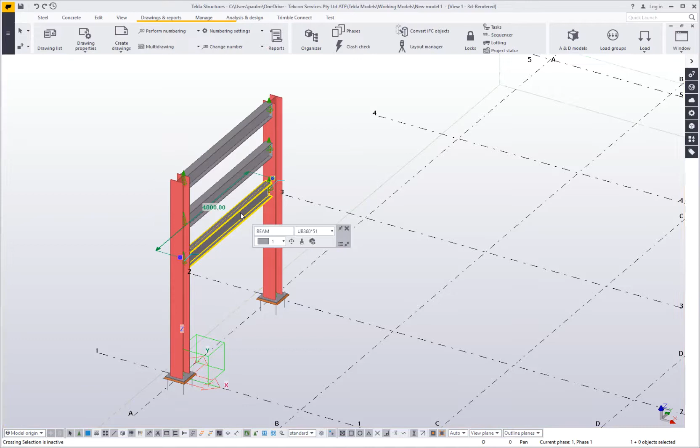Today we're going to look at the contextual toolbar in Tekla Structures. If you hadn't already noticed, the contextual toolbar will pop up when you select any object in Tekla. For instance, if I click on a beam, it pops up the properties with some fields that are most commonly used. If I click on a view, it pops up the fields relevant to the view properties.

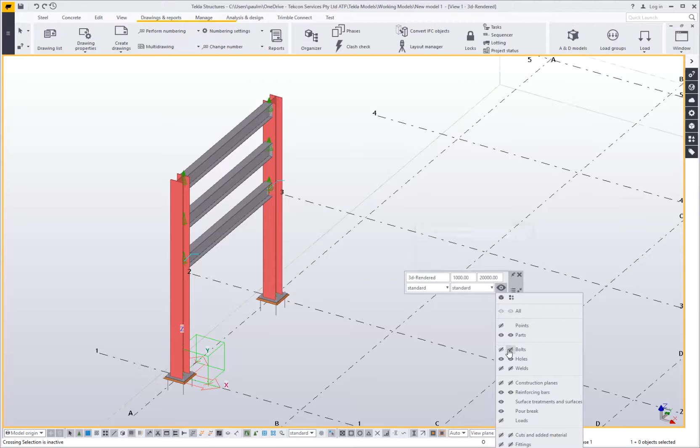One of the most useful options is the visibility of object types in that contextual toolbar for views. If I click on that, it brings up a list of what you can see and what's visible at the moment. So I can turn bolts and holes on and off, and it quickly switches them off there. If I zoom in, you can see it's turned them off in the view. If I come back in and turn them back on again, it's all dynamic and live, so it makes it very quick and easy.

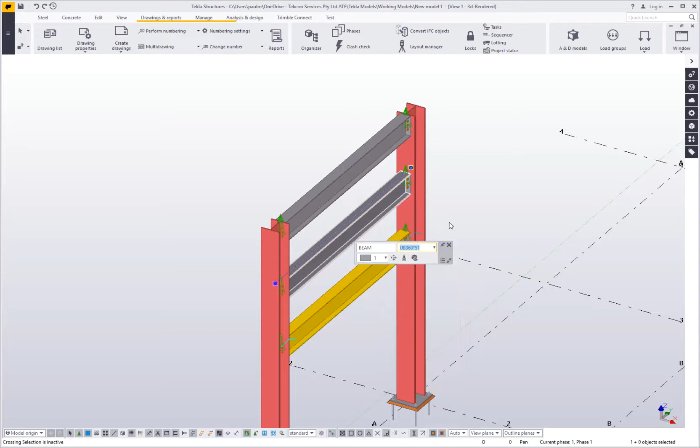The same can be said for the beam properties. If I want to change the class, I can easily just pick on that to change its class. I have other values here - I've got my most recently used profiles, or I can type in whatever profile type, part names, whatever in there.

If I take a look at some drawings, if I bring up the drawing list, and I'll open up a drawing.

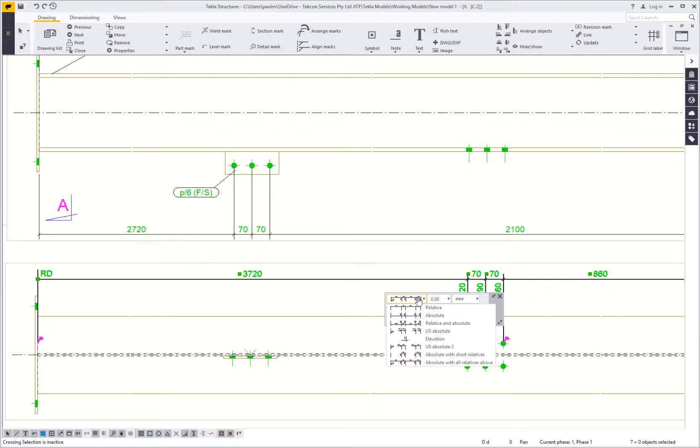One of the most useful tools inside the drawing editor for the contextual toolbar is being able to change from relative to running dimensions quite quickly. So it's just a case of picking the dimension type you want, changing it to relative, and it changes on the fly. So it's quite dynamic.

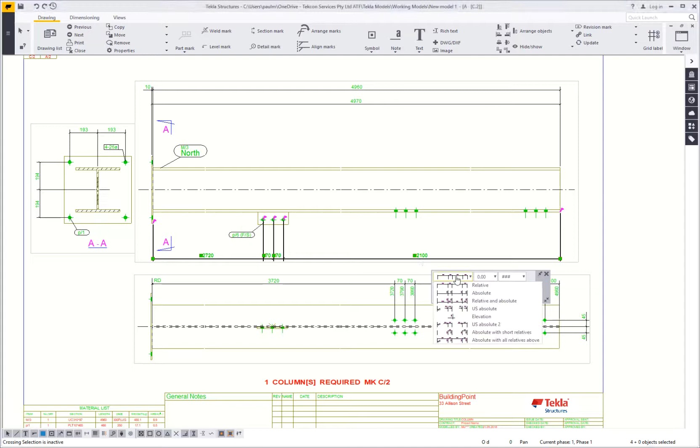The beauty of that is it doesn't apply those settings. As you're editing drawings, you're always flicking between running dimensions and relative dimensions, and applying properties, and then it's applied the wrong settings. Whereas this option here just allows you to quickly and easily change it from relative to running dimensions or vice versa without having to apply any settings.

Close back out of that, and we'll go back into the modeling environment and look at customizing the contextual toolbar. So if I zoom in and click on a beam, I might customize the beam properties. To customize it, there's a little button here called customize. If you click on that, because I've got a beam selected, it's going to by default go to the beams and columns customization options. If I click that drop down, you can see there's a range of different object types, so we can customize what parameters or fields are available for assemblies, bolts, connections, components, grids, you name it.

Because I'm going to customize this, I'm going to give it a new profile name. This profile name is just basically a name for the customized toolbar settings, so you can remember what they are or use them. Some people will have multiple profiles set, so you can toggle between them. I'm just going to have the one, and typically you'd only probably customize the one anyway. So I've created that there.

I can now come in here and turn off the fields that I don't use that often. So I might remove the rotations, just have name and profile. Probably get rid of that one and that one as well, just as some options. So it keeps it very simple. You want this toolbar to just include the fields that you most commonly use.

Not only do you have the basic parameters or fields of the member here, we can also add macros, so you can record your own macros, or there are some here out of the box that come with Tekla, or you can record your own and add them in as well.

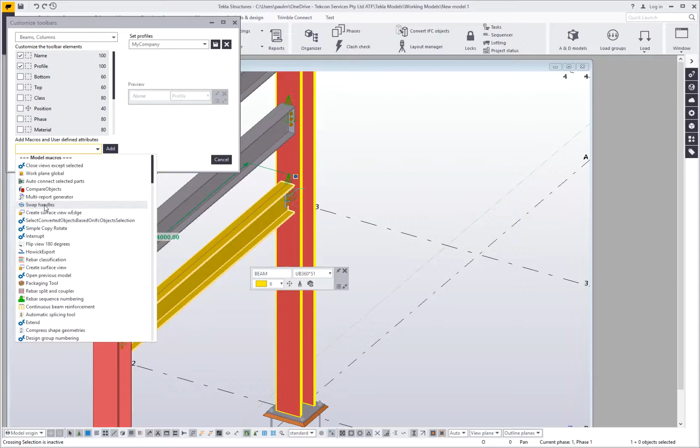If I scroll down further, you can also add some user-defined attributes. One that I like to add is the swap handles tool. So I'm going to click on swap handles and click on add, and that now adds the swap handles as an option down the bottom there. Just as an example, I'll add the comment UDA as well, just so we've got a user-defined attribute to play with.

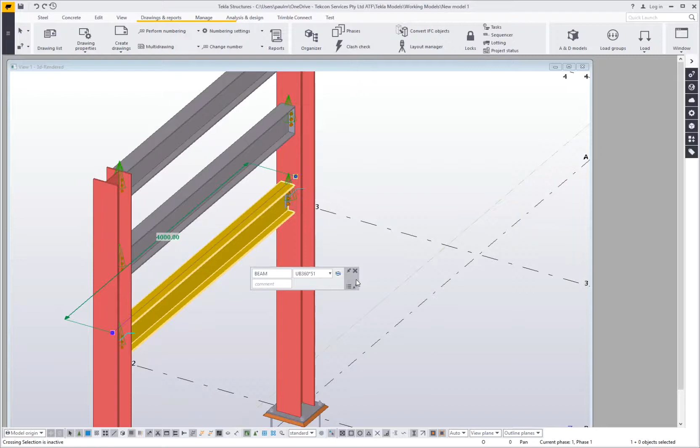Once I click OK on that, you can see down here my contextual toolbar has changed automatically to show those new options. So to try them out, if I click on a beam, I can use the swap handles tool here. Just simply click on it, and that swaps the handles around end to end. Click it again. So it saves you having to go to the component catalog, finding the swap handles tool, and running it that way.

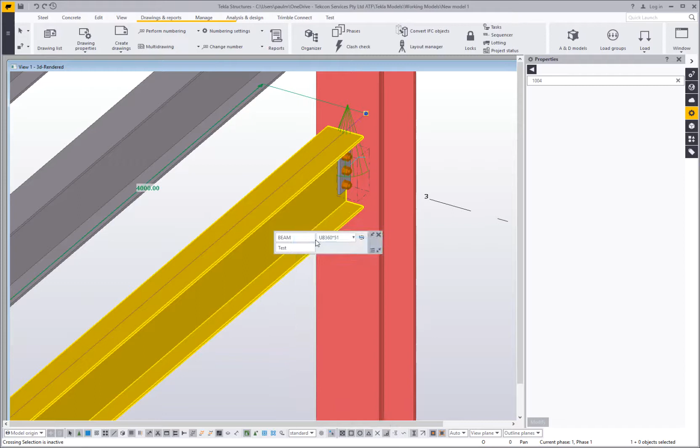With user-defined attributes, you can add your own in here very quickly without having to double click on a member and go into user-defined attributes, or right clicking and getting user-defined attributes up that way. So it's a very quick way of getting into it.

Now once you've made changes to the contextual toolbar, and you might want to use this in future versions of Tekla, you can copy the file around, and it's in a fairly obscure path, but the contextual toolbar is stored in that folder. It's under the app data section, so it's under your local profile: Users, your username, App Data, Local, Trimble, Tekla Structures, the version, Contextual Toolbar, and then Profiles. And then that's the profile that I've just made now.

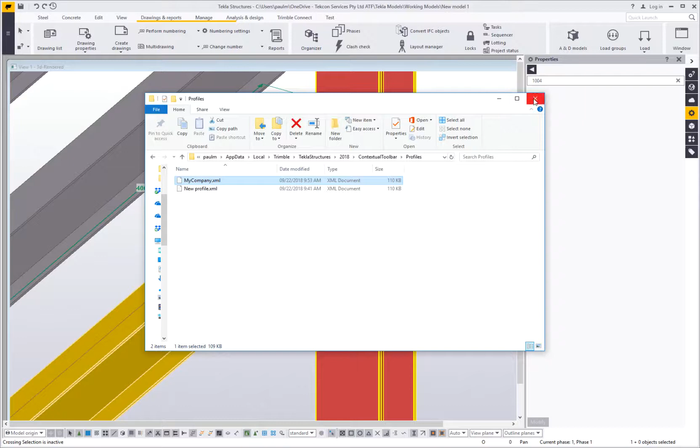So you can pick up that XML file, copy that into your firm folder, and then you'll have this customized contextual toolbar available in future versions as well. You will still have to remember though, when you start Tekla up in the next version, to come into customize and select the new profile, because otherwise by default it will revert to the default profile. So you need to still do that as a process - it won't automatically adopt the profile that you've put into the firm folder.